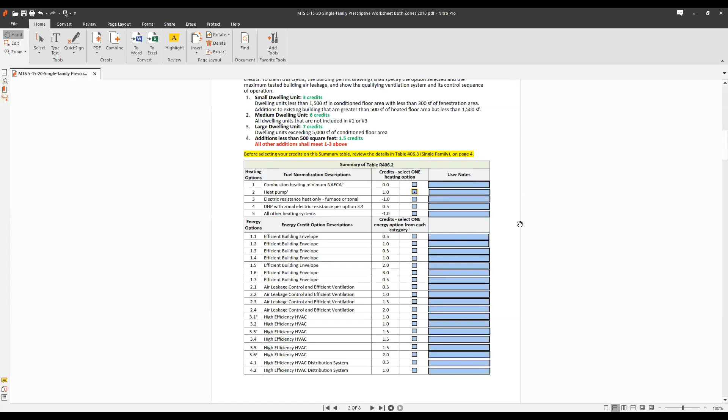So we're going to assume this is an all-electric home with a central heat pump, and then we're going to go in and look at the different energy options. So the first pack is the options in column 1, and those options have to do with the building envelope. Let's click on option 1.1. And if you click on that one, that'll give you a half a credit.

And what that is, that's like going to an R38 in the floor and getting to about a .28 window. It's a little bit better shell. Now let's see if we go down to the section 2 energy options. Those are the build tight, ventilate right options. A lot of people take that 2.1. That's basically testing the building down at 3 air changes an hour and putting in an Energy Star exhaust fan that's energy efficient. So let's start with that one.

So now let's go down to the 3s. The 3s are the HVAC system. So in this case, you could take the high efficiency HVAC system 3.1, that would be the heat pump, and it has a little bit higher HSPF than is required. Well, let's see, you want to take 3.2, let's check. 3.1 if the heat pump, yep, 3.2, excuse me.

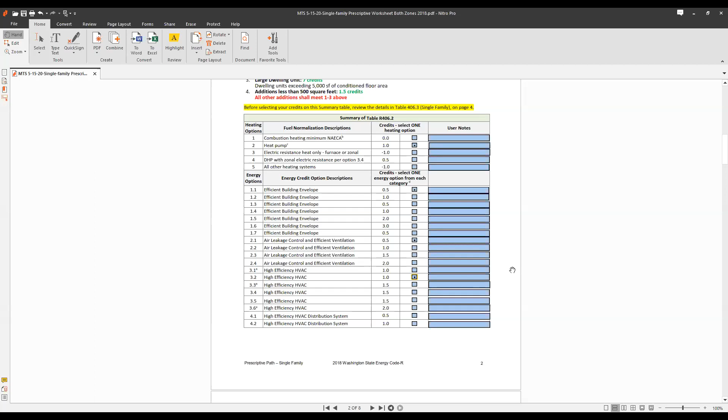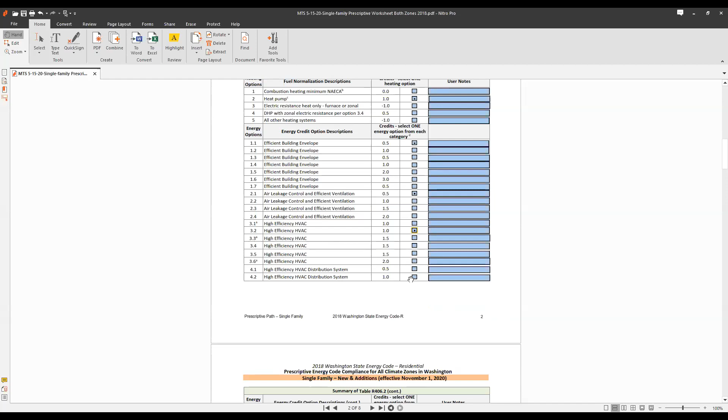So then if you go down to, say, hot water on the next page, and then, oh, I'm sorry, then we want to move all the ductwork into the conditioned space and get a credit for that under 4.2. So click on 4.2. Now, if you scroll down all the way, you're at 4, and you need to get to 5. If you put in a heat pump water heater, and say you wanted the one that's the tier 3, that's probably a 1.5, that's 5.4. If you go with 5.4 credit, now you're, yeah.

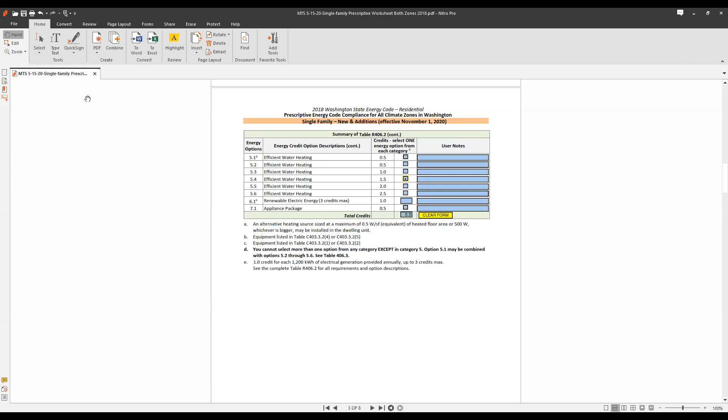Hey, Mike, sorry to interrupt. Can you make your screen bigger? You've got a lot of white space and the letters are practically invisible. Oh, thank you. Melinda, can you do that? Oh, yeah, much better.

So here you'd be at 5.5. You need 6. You need to come up with another half a credit. So you can do this by going to a more efficient heat pump water heater. If you went to the tier 3, that would get you 2 credits, and hit that, and bingo, you're there. So let's just recap. You got 5.5. That's a heat pump water heater.

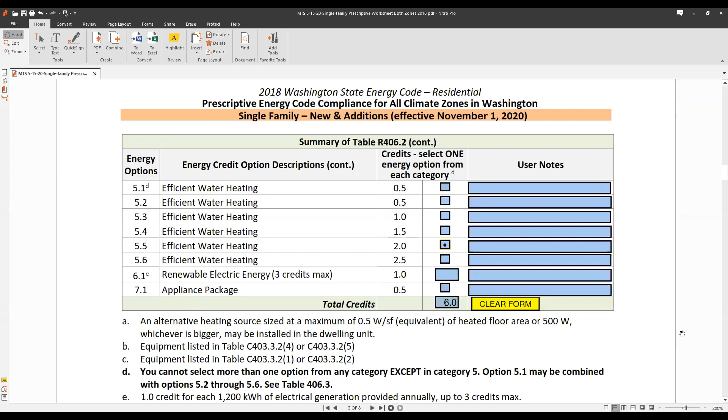Why don't you scroll back up, Melinda? Whoops, too far. We're going to move all the ducts into the conditioned space, get a credit for that as 4.2. We're going to get a credit for a high efficiency heat pump, and we're going to get a credit for, no, I'm sorry, go back up. Sorry about that. And we're going to get a credit for a little bit more efficient building envelope that's built tight and ventilated right. And that's how we would get one option towards getting the 6 credits.

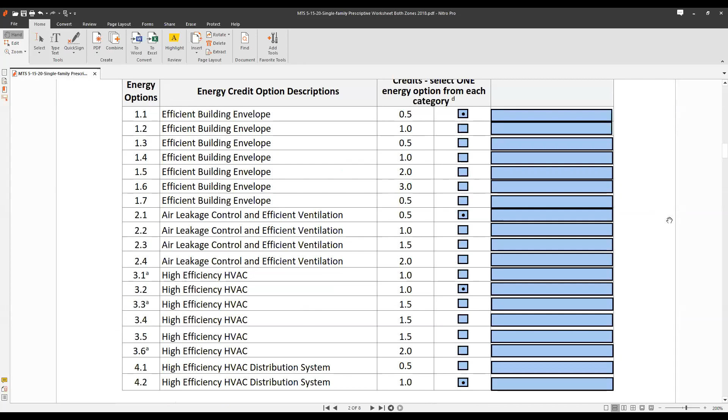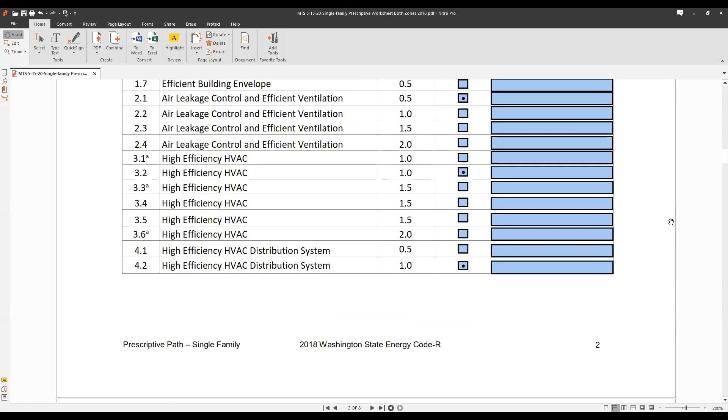And this is just a little show and tell of the form that's going to be fleshed out. And there's a whole bunch of other options. I think a lot of the Eco Building Guild members that are more focused on envelope to comply are going to get very innovative, and we'd like to see what you got in the way of coming up with ways of meeting the envelope requirements. There's also some options, Melinda, if you scroll down a little bit more, for renewables and appliances. And we'll talk about that a little bit in the presentation. So I apologize, I couldn't see a lot of that, but this is just kind of a quick show and tell.

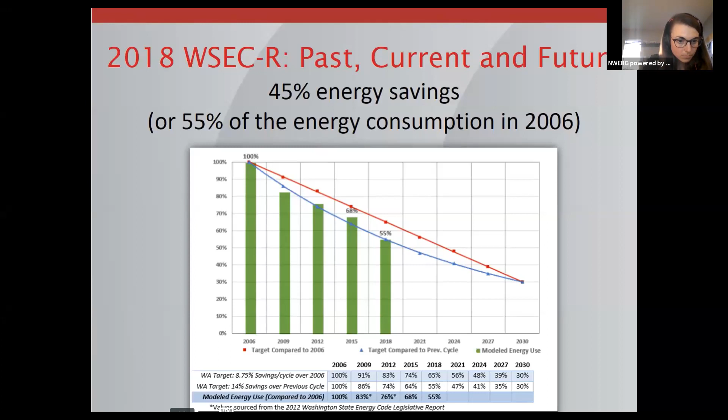The challenge is that as we get lower, we have less opportunities to find cost-effective measures, or in other words, the low-hanging fruit isn't there anymore. This really is going to challenge us, and I'm going to present some of the solutions for meeting today's energy code and the future energy codes that will be coming by finding a balance between mechanical HVAC, water heating, thermal envelopes, and renewables. And the energy code will provide some flexibility towards meeting those goals.

The code is broken out into 6 chapters: scope and administration, definitions, general requirements, residential energy efficiency. That's a big one to review. And if you're involved with additions, existing buildings, change of use, it's critical that you understand Chapter 5. In addition to that, we have our reference standards, and that's just pretty standard boilerplate.

We do have Appendix A, which is there to help guide you if you have heat loss questions as you develop your U-factors for your assemblies. If you're using non-conforming types of assemblies with different types of products that aren't necessarily part of our prescriptive compliance approach, you'll need to refer to Appendix A for equivalent U-factors. I'll get into that a little bit more. There are some other appendices as well associated with modeling, software, and the weather stations.

Really, Chapter 4 is where the meat and potatoes is in terms of understanding how to meet the energy code. Section 401 is general. Section 402 gets into the building envelopes. Section 403 is mechanical systems, water heating, HVAC, etc. 404 is electric power and lighting systems.

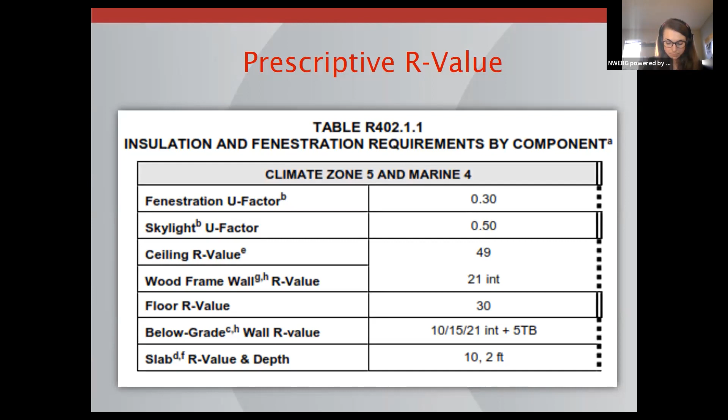These have been around for quite a while. Now, we're going to get some additional credits. 406 that I've been alluding to is the additional efficiency requirements for all new construction covered by the code. This includes additions. We're not going to talk too much about additions today, but they need the energy credits. And change of occupancy. Say you're turning an old shop into a dwelling unit or a garage.

Anyway, these are all requirements that are in Section 5, which is the existing homes area, and all the requirements you'll need in Section 406. So this is where we need to get to. All right. So these are how these energy credits are factored. Small home, 3 credits. This would be 1,500 square foot of conditioned floor or less. Medium, 6 credits. Large dwelling, 7 credits.

Dwelling serving R2 occupancy, that is low-rise multifamily. Not townhomes, but low-rise, 3-story or less multifamily. Generally corridor loaded or individually garden style, what they call woody walk-ups. 4.5 credits. That tripled from 2015. Additions went to 1.5 credits. Less than or equal to 500 square foot. It used to be a half a credit. So there's going to be some real challenges, particularly in the medium dwelling and the R2 occupancies as well as the additions.

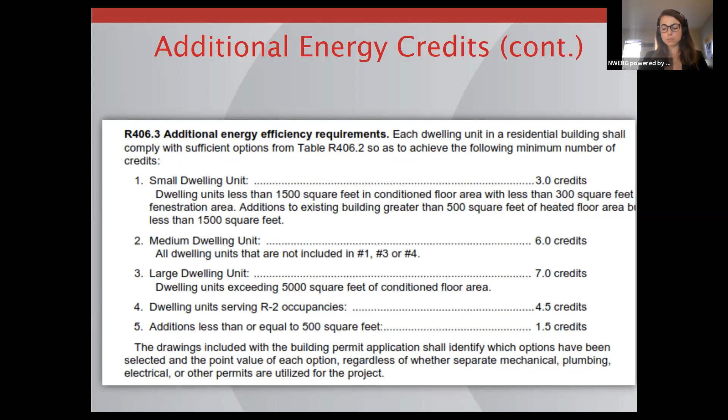All of the information on these energy credits needs to be clearly identified on the plans and the permits and the tools that we have to show compliance, like the prescriptive path worksheet. All right, where were we? We were at 1.5 credits for small buildings. That went up to 3. 3.5 credits went up to 6 for medium-sized buildings. Again, large buildings went from 4.5 to 7. This is 5,000 square foot large dwellings.

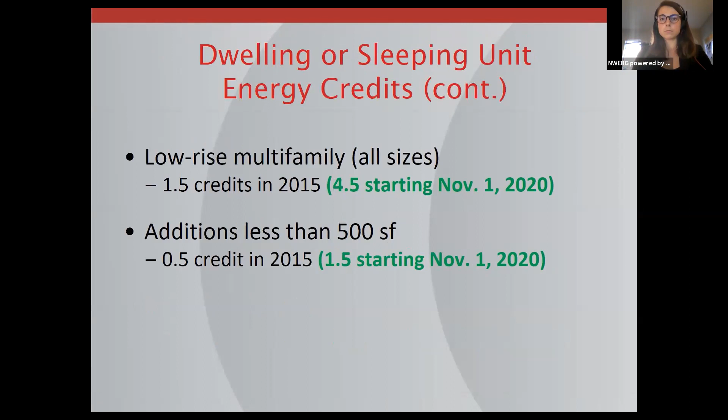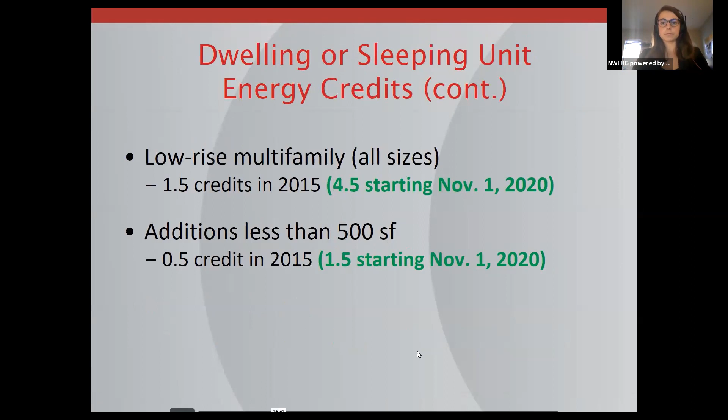Multifamily went from 1.5 to 4.5, and additions, the small additions less than 500 square foot, like a garage ADU or something, went from 1/2 to 1.5. In addition to that, there was a proposal that was accepted, appealed, and the appeal denied, having to do with fuel normalization. This gets back to carbon emission equalization.

As I noted, the requirements in the energy code from the state legislature require improvements in energy savings to 2030. There's another metric that has entered into the realm, and that has to do with reducing our carbon footprint and looking at energy codes as a possible way to help in that reduction. This is what we're talking about.

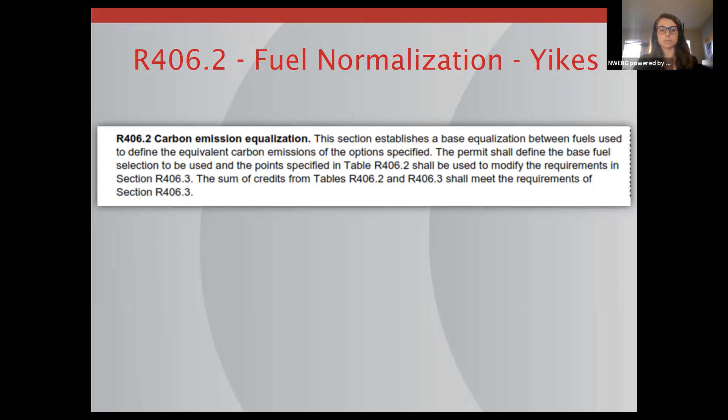If you're building a home and heating it with a combustion device, in other words, a gas furnace, oil boiler, something like that, that uses combustion heating and fossil fuels, you will get no credits in the energy code for that. So say you're trying to meet 6 credits, you get nothing if you put a gas furnace in or a fossil fuel furnace. Doesn't ding you, but you don't get any credits.

Now, if you go to system type 2, the initial system uses a heat pump. This is just a minimum efficiency heat pump on the market. You get a full credit, both in single family, which is called all other, or R2, which is the low-rise multi. Now, if you got into an electric resistance heat, so this would be baseboard, Cadet type heaters around the house with no heat pump, you actually have to come up with another credit. You get a negative credit in both single and multifamily.

If you put a ductless mini split in, which quite often folks do, and you do that in accordance with the requirements that would allow you to put it in the primary living area and heat the other areas with electric resistance, instead of a heat pump in type 2, which gets you a full credit, you'd get a half a credit for that mini split serving the large area. And any other credits that don't fall into that would be a negative credit and would make it more difficult to comply with the code, both in the single family, and there's a half a credit there for R2.

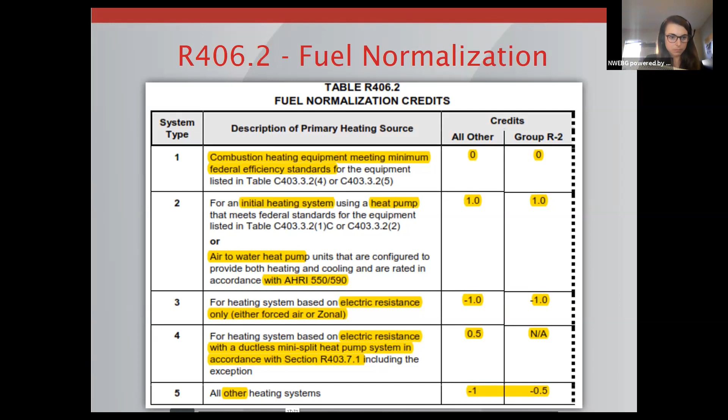So now let's talk about the energy credits in general. And I'm going to start by pointing out that this is kind of like a Chinese menu. You get so much from column 1, so much from column 2, column 3, all the way up to column 7. But you're only allowed, generally speaking, 1 from each column. So the first important area to understand is the energy envelope credits. Now, these credits have been changed from the 2015, a lot more of them.

And I'm going to quickly go through what these credits are. Credit 1.1 is basically going to a better window or vertical fenestration of U-0.24. So if you take our glazing worksheet, which is available to help you determine what the overall fenestration U-factor is, and you put in your window schedule, and you come up with an average of 0.24 or less for your fenestration, you would get a half a credit by taking option 1.1.

Instead of going 0.24, say you went to a triple pane window and went something around a 0.20, you get a full credit in both single and multifamily. Now, if you wanted to combine that, say a slightly more efficient window than the minimum 0.30, say a 0.28, this is what quite typically is available in the market with the current code, and you add R8 to the floor. So instead of an R30 in the floor, you have an R38. So slightly better window, 0.28 window, R38, or if there's slab on grade, the entire slab would be insulated. If you were to do that, you would get half a credit in the single family.

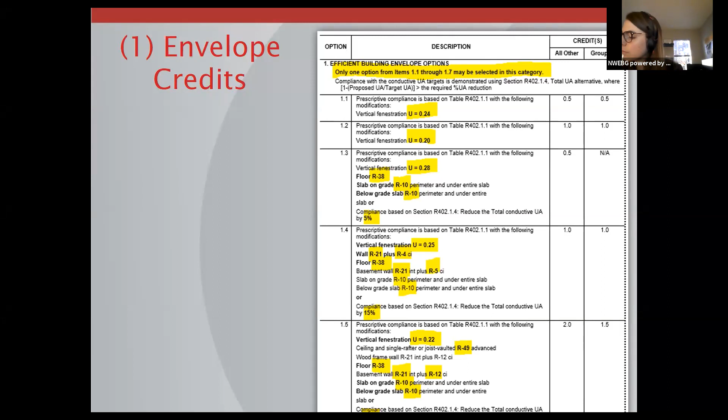We also have some other credits that are really high efficiency, super triple pane windows, 3 inches of foam sheathing, R48 in the floor. This is 1.6. We're showing a 40% reduction in the envelope to get you 3 credits. These are kind of passive house level credits, or very energy efficient builders building with double wall construction and very innovative building systems. For those, you get 3 whole credits and you can reduce the need to put in expensive HVAC and mechanical equipment. It's all about your comfort, your familiarity, and your sub's familiarity with these options.

I would encourage all builders and subcontractors to start looking at the future and deciding, is this something they want to get up to speed on now? Do I want to learn about how to build a higher R-value wall? Do I want to learn about what are the challenges of triple pane windows?

Anyway, then option 1.7 is a little step back, and if you needed a half credit, you could get that half a credit by going to reasonably good windows, which are out there now, and everybody's using at about a 0.28, and go to an R49 advanced ceiling. And that would be like an oversized truss or a way of making sure you have R49 fully at the eave all the way out where it tapers. And that's a half a credit that might be afforded to folks that want to do that. Okay.

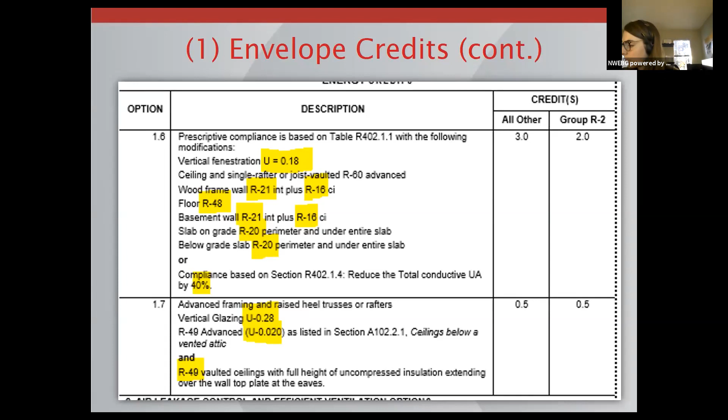Next is column 2. This is getting into what we like to call build tight, ventilate right philosophy in residential building science. It's about controlling the air leakage, building the home tighter, and then putting in effective mechanical ventilation that allows the occupants to control their indoor environment as opposed to Mother Nature.

I've been working in this field for over 40 years, and the question I always get when we talk about build tight, ventilate right is, how come they make us tighten up the home and then they make us put a fan in to ventilate it? And I always answer it as, who do you want in control of the indoor environment and your indoor air quality? Mother Nature, or your tenant, or the building owner, or the occupant, the homeowner? Whoever it is, they're empowered to control their environment as opposed to Mother Nature.

With Mother Nature, in the winter, typical homes are over-ventilating and wasting energy. In the summer, they're typically underventilating. In the shoulder months, many people don't open their windows for a variety of reasons, and they can also be underventilating. It also means that if there is some sort of a pollen event or some sort of event where you might not want to ventilate, you don't have control because you have a leaky home and Mother Nature's in charge. Build tight, ventilate right. The philosophy, again, is who do you want to be in control of your indoor environment?

It's not without challenges. If you're going to build tight, ventilate right, you have a responsibility to let everybody involved know what your goals are. And that includes education of the occupants and commissioning of the system, which I'll talk about later in this presentation.

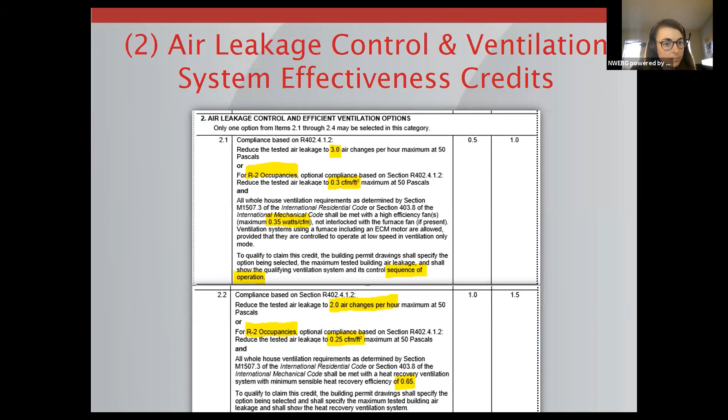All right, so you get a credit if you get down to 2 ACH and put in a reasonably efficient air-to-air heat exchanger or energy recovery ventilator. If you make it tighter, if you get it down to 1.5 and put in a more efficient heat recovery ventilator, you get 1.5 to 2 credits.

2.4 suggests down to passive house levels. Really takes some experience to get here. And you get down to a 0.6 air change at 50 Pascal, tested blower door credit. Then you're able to get a high efficiency heat recovery ventilator with 80% or 0.8. You get 2 credits or 2.5 credits in multifamily. So that's the cookbook for the Build Tight, Ventilate Right option 2s.

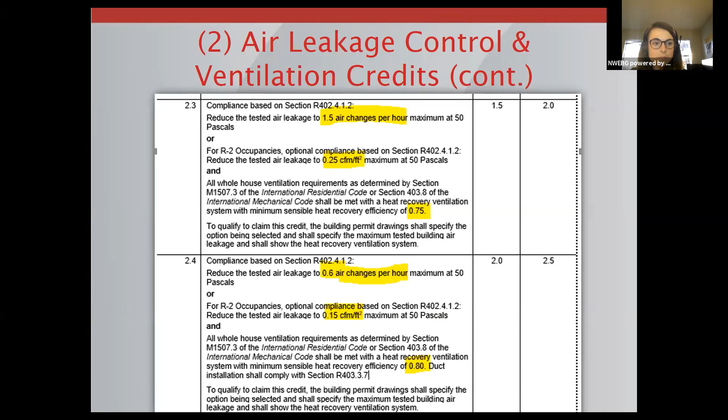Option 3s really get into the HVAC side. So once you've figured out what you want to do on the envelope and equipment for ventilating, then let's think about what kind of HVAC system you're going to be putting in. As I noted, you won't get any credit for the gas furnace, but if you put in a condensing furnace using 3.1 high efficiency Energy Star furnace, you get that credit.

Or a boiler with Energy Star boiler. Now, if you put in a central heat pump, not with a minimum efficiency, but a little bit higher than the federal minimum, with a heating seasonal performance factor of 9.5 or greater, you get an additional credit. In other words, you get that fuel credit before, plus this additional credit for going beyond the minimum heat pump efficiency. Same thing for 3.3.

You get a COP on a ground source heat pump. This would typically be done in a large McMansion or larger 5,000 square foot building where you typically see these, or in some sort of district heating in the event of a commercial shared integrated system.

The other way you can get a credit, and this is the way most people do that have balanced out electric resistance in the bedrooms with a primary heating system that was zonal electric, what they do is they put a mini split in the largest zone of the house, and it is able to take away a lot of the electric resistance heat from the other zones as well as the primary zone.

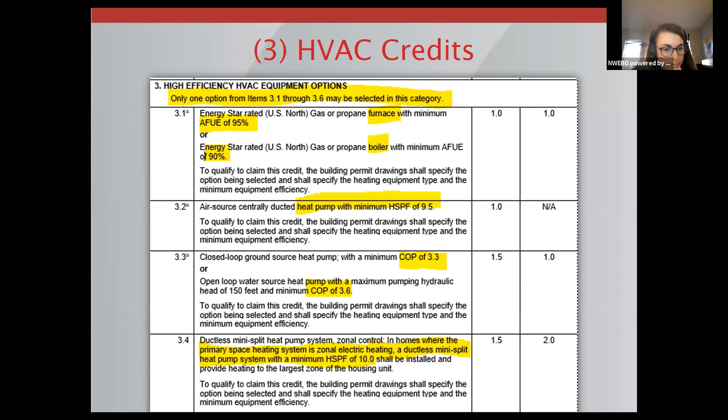We have some more. If you were able to put in a centrally ducted system and put in a heat pump with an HSPF of 11, this is a higher performing heat pump. You get a credit and a half for it in single family. There is no credit for it in R2 multifamily.

Then if you were to go to a ductless mini split where you didn't have electric baseboard in the back bedrooms, but you had other types of efficient mini split heads, and they all had a minimum HSPF, heating seasonal performance factor of 10 or greater, you get 2 whole credits. So if you start to go to a ductless system and no electric resistance backup, you get up to 3 credits in R2 and 2 credits in single family.

You'll note this little footnote A. It's important if you are getting the credits where footnote A applies. That means you can't be putting in any backup electric resistance heat more than a half a watt per square foot. That means a 2,000 square foot home, if you needed to put some heat into the bathrooms or some little utility closet, you'd be limited to 1,000 watts. This is something to pay attention to as you design your heat pump system serving all the zones.

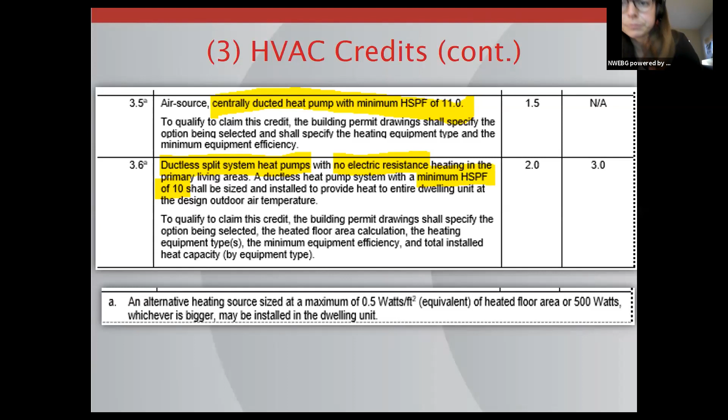Distribution credits. Now, if you were to go to a ducted system, and you move all the ductwork inside the conditioned space and the air handler, you would get credit 4.2. This is the most important credit in the new energy code. We're not going to be able to move forward in the future meeting the energy code in a cost-effective way if we keep putting our air handler in the garage and we put our supply ducts in a vented crawl space and our return ducts in a hot or very cold attic. This is the way it's always done, and this is the way it can no longer be done. This is the big change in the energy code.

And I'm going to talk a little bit about this. So this is the buried ducts. You get a full buried duct credit. You don't have to test for 4.2. We did provide one other option. If you move your air handler inside, you're allowed to bury some of the supply ducts and return ducts up in the attic, but you only get a half a credit, and you still have to do the testing of the ductwork. So this is the most cost-effective credit, 4.2, that anyone has ever had for years, and now it's going to be time that we take advantage of it.

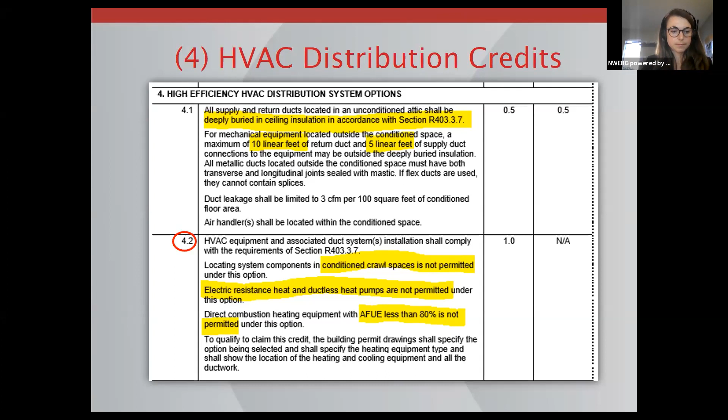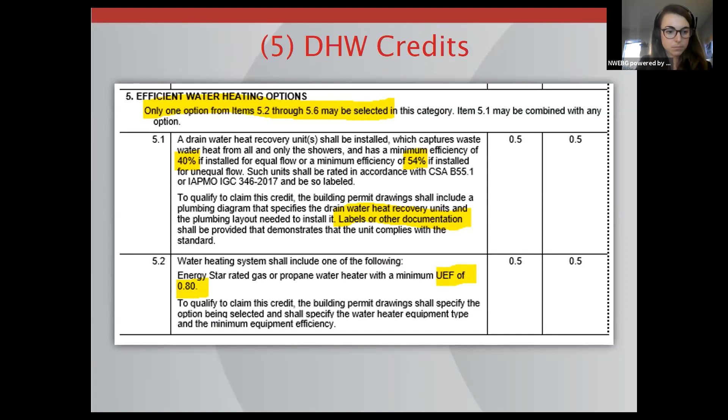Or if you put a solar hot water system in, which we have not seen a lot of. We've seen a lot of solar PV, but not a lot of solar thermal. But you could also get the credit for solar hot water. I know some of that's going on over in Eastern Washington with some innovative builders. Water heating, the way that folks are going to be moving in water heating, if they're not going gas in the future, is to heat pump water heaters. And these are virtually going to be needed if you want to come up with the sufficient energy credits in many of the cases here.

You can get a heat pump water heater credit of 1.5 for a tier 1. I would encourage everyone to go to NEEA's advanced water heating specifications. Just Google NEEA and hot water and spend half an hour learning about this technology. This is critical technology. Along with ducts in the conditioned space, this is a technology that you most likely will need to be familiar with and embrace with the new energy code.

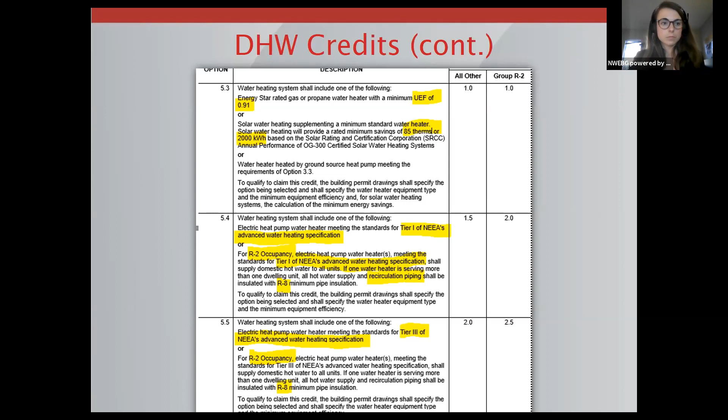You can even get the tier 3. Most of the products out there now are the NEEA tier 3 and get 2 to 2.5 energy credits for it. If you were to go to a high efficiency split system, a heat pump water heater with a UEF of 2.9, there's a few of them in the market, you could get 2.5 to 3 energy credits.

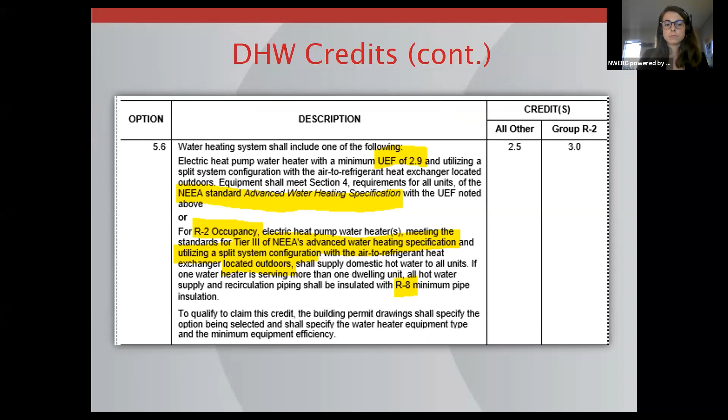There's also credits for renewable energy. So generally speaking, around here in western and eastern Washington, a well-oriented performing system will, for every kW of PV power, generate anywhere from 800 to 1,200 kilowatt hours. If you were to put in a 3 kW system here, you could get a credit for each kW roughly. So we're talking about being able to show that you've got 1,200 kilowatt hours of generation, and for each 1,200 kilowatt hours, you get a credit, up to 3.

So if you put a solar system on a multifamily building and apportioned it to each of the units, that might be a solution for some builders to get some of the energy credits they need. Same thing with single family. If you're going solar, consider these energy credits.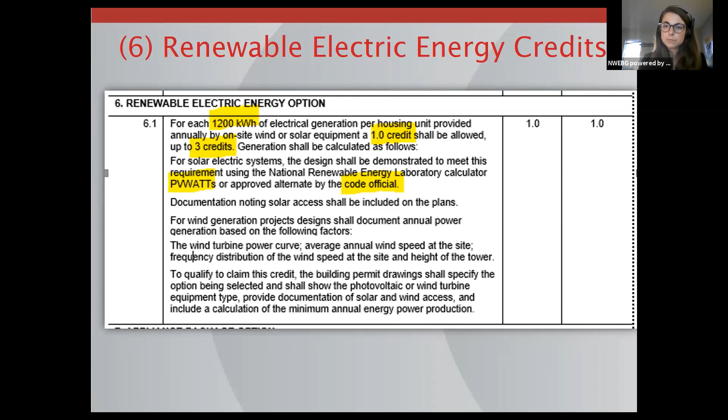There's also appliance credits. These are new. We'll talk a little bit about what they require. You get half a credit for it in a single family and a credit and a half in multifamily R2. A dishwasher, Energy Star rated, that's no big deal. That's pretty much all of them out there. No real incremental cost for that. Or an Energy Star refrigerator. And you would only have to provide the refrigerator if it was being installed as part of the home. If there was no refrigerator there, then you would not need that credit.

However, the big jump is the Energy Star rated dryer, which is a ventless dryer that has to have a significantly higher efficiency, a CEF of 5.2. This is a new dryer that's gaining a lot of attention in the United States. It's been used in Europe for years. This may be an option that many multifamily builders want to look at because it eliminates the need for a dryer vent or a penetration in the exterior envelope. So that's the appliance credits. Get familiar with the Energy Star appliance program and see if this meets your needs for your credits.

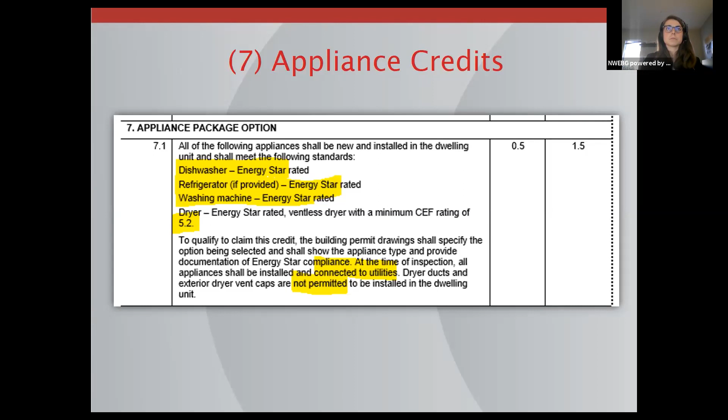All right, so let's talk about where the combinations are that might get you there. I'm going to give a couple examples. This is an all-electric heat pump home. It's your medium-sized home where 6 credits are required. In other words, it's somewhere between 1,500 and 5,000 square feet. First credit that we're going to get is a 9.5 HSPF, centrally ducted heat pump that's serving the house. And there's no backup heat other than, say, half a watt per square foot.

That's footnote A. Then we moved all the ducts into the conditioned space because we actually sat down with this floor plan with the heating contractor ahead of time and the builder and the designer and figured this stuff out. If you don't figure it out, you'll never get this credit and you will have lost the most cost-effective option in the energy code. Let's get this credit on every new home. The code needs to transform our practice in the Northwest of moving ducts into the conditioned space and getting them out of the garage, the attic, and the crawl space.

You don't buy an expensive Tesla and drive it on flat tires, nor do you buy an expensive HVAC box and run it in an unconditioned space so that only 2/3 of the heat that it generates makes it to the house. That's what 4.2 is all about. I'll talk to you a little bit more about that later and the importance of it.

Then we build tight, a little tighter, get it down to 3 ACH. That's just coordinating with your sub so that they know who's going to seal the leak, where the leak is, when that leak gets sealed, what material that leak gets sealed with, and who's going to check on it. It's just basic QA, whether it's gas piping, ductwork, or water piping.

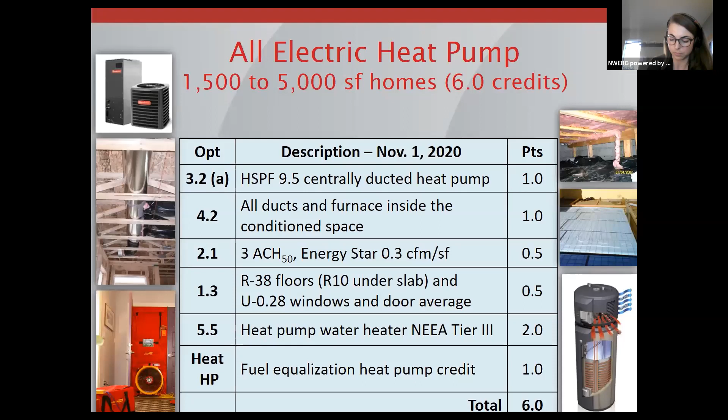Next one would be, say I don't want to use that heat pump water heater. They're going to run out of water. I want to have some gas water heat. Well, so now we go to a higher efficiency heat pump, get a little bit higher credit, move all the ducts inside. Don't want that Tesla on flat tires. Continue to build tight, ventilate right, put in the good windows and the floor insulation, and now go to a tankless water heater, as you'll see down in the lower right-hand side. This is vented to the outside, combustion air from the outside, no interaction with the inside, no venting issues, and you get a fuel equalization credit because you went with a heat pump, even though you had gas water heating. The fuel equalization credit only applies to the space heating. All right, so that's how you get there with a heat pump heat and gas water heating.

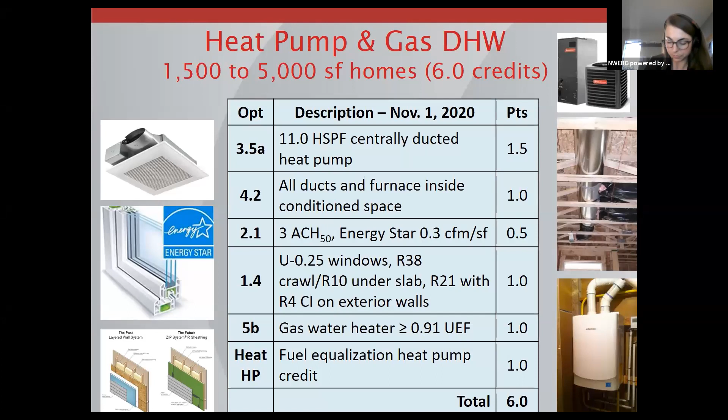Now, so you wanted to do gas heat. I want a gas furnace. And you might need to be putting in a heat pump water heater or coming up with some more of the innovative envelope measures. So you put in a 95% gas furnace, get a credit, move all the ducts and the air handler inside, build it tight, ventilate right. Slightly better windows. Now you're going to have to put R4 CI on the walls, foam sheathing or something equivalent to get that credit. And you need to go to an appliance or something equivalent to get a half a credit. And then you get your heat pump water heater in there and get your 2 credits. So the gas heat's going to be a real challenging one. But this is one option on gas heat.

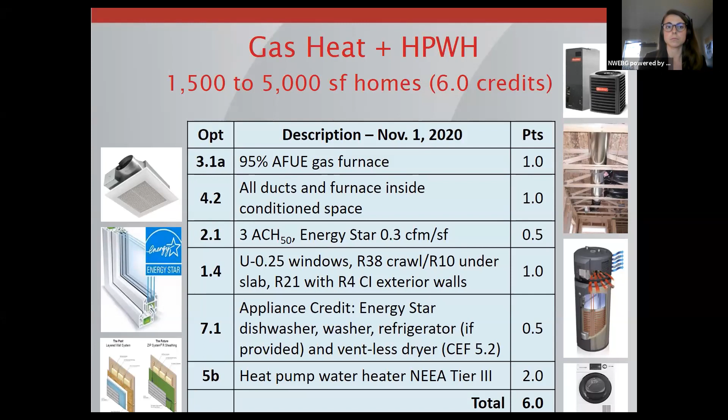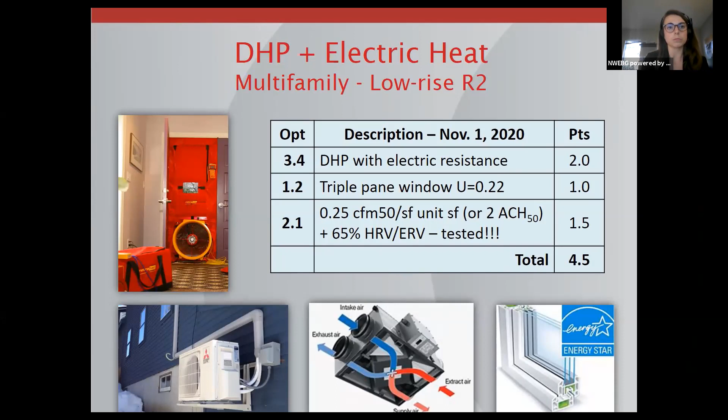Now let's talk quickly about ductless heat pumps, electric resistance, multifamily. Go with ductless heat pump with electric resistance, triple pane, heat recovery ventilator, and a tighter envelope. That would get you there. If you went with ducted cassette units or some sort of combination of mini split or multi-head heat pump that serves the entire unit, and there's no electric resistance backup, you could get the fuel equalization credit, the 3 for the heat pump, and build tight with an HRV, and you get your credits that way. You actually have a little bit extra.

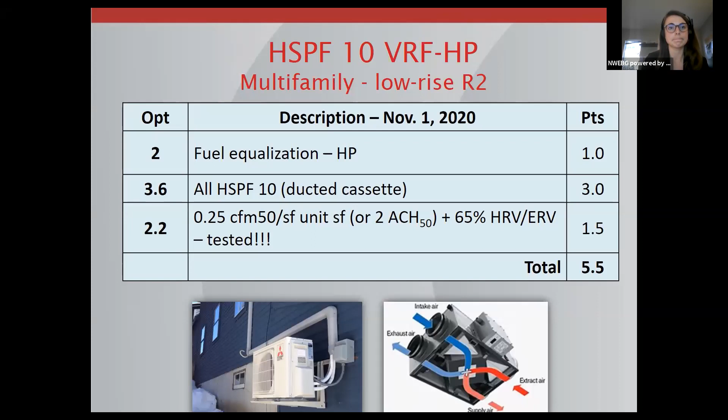So let's talk about the other compliance paths. At this point, we've gone through some of the options in the prescriptive paths, and the UA alternative is something that if you have envelopes that aren't prescriptive assembly, you can use default values to get there. The challenge with the UA alternative is that if you're building a house with more than 15% glazing, it becomes a lot harder to make it comply. The prescriptive path allows unlimited fenestration, whereas the alternative UA does not, nor does the simulated performance path. Note to architects, if you're building a house with a lot of glazing, this is going to be a challenge to you.

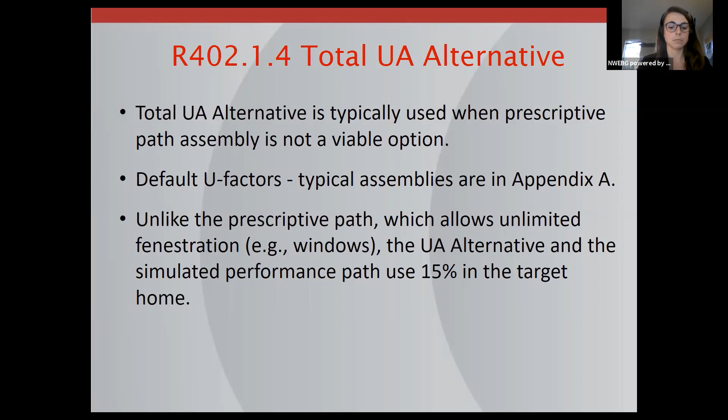All right, so we have a software program that does these calculations. You would go in and put the information in on the particular home and the size of the home. It will determine how many energy credits are needed, as well as what UA your proposed design has to come in to to meet the code. So here we have a 2,300 square foot home where the target U values are based on the prescriptive path, and a target UA of 367, that's BTUs per hour per degree Fahrenheit.

And you also would have to come in with 3.5 credits for the size home. The proposed design, if you look at it, has 398 as the UA, and the credits are 3. So this clearly would not comply, for 2 reasons. It's short on credits, it's short a half a credit, and it's short on UA. So they have to go back and make some adjustments and do more trade-offs so you could come in under the 367 and also select another energy credit.

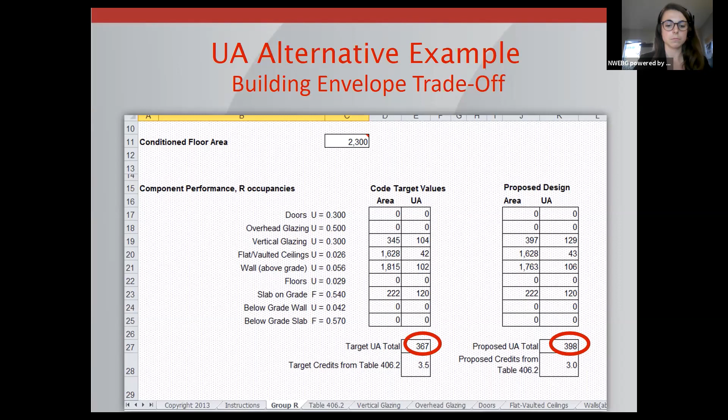As I said, not many people use this approach. If you do and you have questions, we have a training video on it, and also call us and we're happy to help you. Simulated performance approach has the same challenges. It makes it harder to comply when the building is over 15%. And also, as I noted, we're not aware of currently any software that meets the requirements to be used. We may start to see this as energy raters start working with builders who want to meet our energy code and also want to get a tax credit this year.

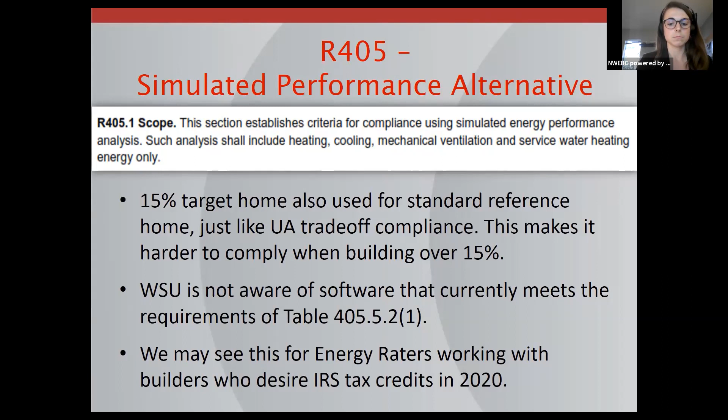All right, we're going to start to talk about the other end. We've been talking about the design end and what needs to be submitted at the design end in terms of compliance. At the field inspection, before a CO is given on the home, a permanent certificate shall be completed by the builder or the approved party. That needs to be posted on the wall in the space where the furnace is located, utility room, or an approved location. The certificate shall list the R values, ceilings, walls, slabs, all of that stuff, the U factors for the glazing. It needs to have the HVAC, the water heating, the appliances, the renewables, and it needs to document the testing of the ductwork leakage.

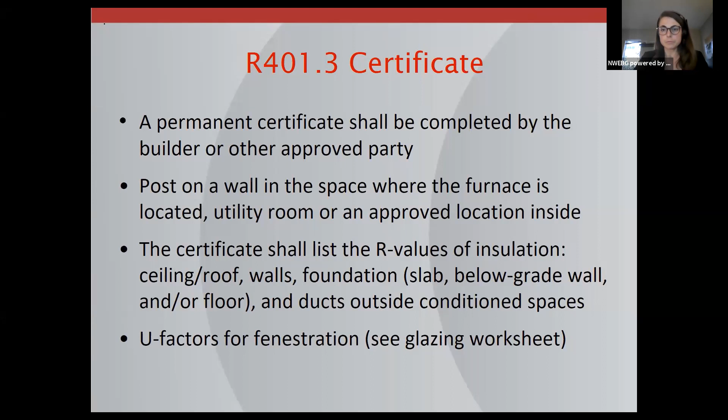Remember I noted that if you move your ductwork outside the conditioned space, you need to test the ductwork. Well, that would need to be documented. The results need to be documented on the certificate, as does the blower door test. Remember I said you need to come in at 5 ACH50 to meet the code and get a CO, or lower if you're trying to get some energy credits. That will need to be documented with an envelope air leakage, what they call blower door test. In addition, if you're going to build tight, ventilate right, you need to commission the ventilation system and make sure that it is ventilating right. So you're going to need to document the flow rate of the system in accordance with the codes. And this is the certificate.

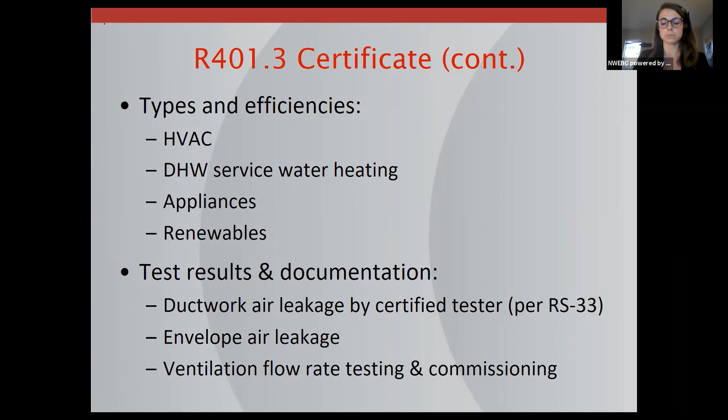The code official may require test documentation, including an electronic record of time, date, location of the test, using a time stamp, smartphone photo, or air leakage testing software. I've been working the code program for almost 2 years now, and I can tell you that there's a lot of non-compliance with the blower door and the duct leakage tests. People are cheating, writing down incorrect numbers, or just writing down things because they didn't know better. What we call outliers. As a result, the new sticker has a requirement to provide GPS and timestamp verification so somebody can't write the same number down over and over and over.

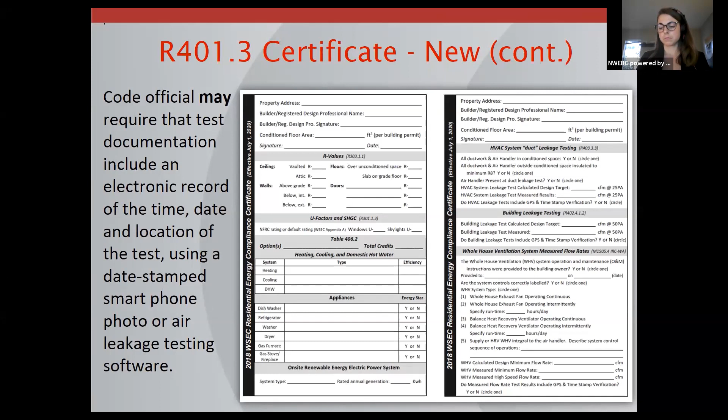Expect building departments will start asking, do you have documentation of these tests that you wrote down on the certificate? Expect the building departments will start asking for these certificates to be completed and signed off on. So this is really important. As I noted, here's the section on the duct leakage testing. You notice it says, do HVAC tests include GPS and timestamp verification? It also asks that for the blower door, the building leakage tests. And a whole new section on the mechanical ventilation system. Somebody's going to need to sign off that they provided the operation and maintenance instructions to the building owner, and on what date. They have to define what the type of system is and if it was correctly labeled and specify the controls.

Then they need to determine what the design flow rate for the whole house ventilation system was and determine that that is being set on site during commissioning. It also asks to turn the system up to high speed and measure the flow rate. Many times people will want to have a little bit more flexibility to increase the ventilation rates when more people are in the home or something's going on. So we're documenting the measured flow rate for compliance with the design, and also documenting the flow rate on high speed. And then again, can you verify it?

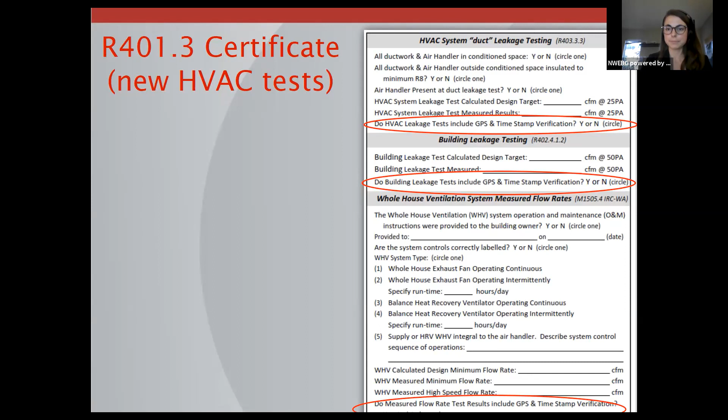If you are the tester, you may have the duct leakage affidavits to sign and give to the builder so that the builder can fill out the certificate. We have these affidavits for new construction and existing construction on our website you can download, or use your own agreements. We also have tools for the duct testing calculations if you're not going to do them with the software provided by the manufacturers, as well as the blower door calculations. So those are calculators and affidavits that are available to help the subcontractors document their work to the general.

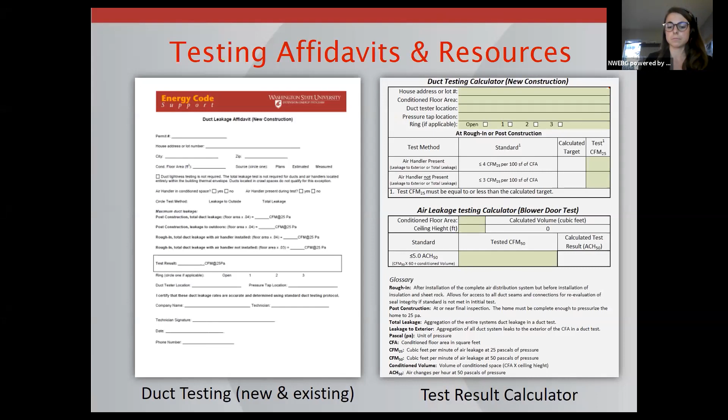All right, so why is it that we seal ducts? We seal ducts for health and safety, comfort, energy savings, and durability. Here's an example. It likely has to do with some moisture damage from overpressurization of a home. We don't know, but we will learn.

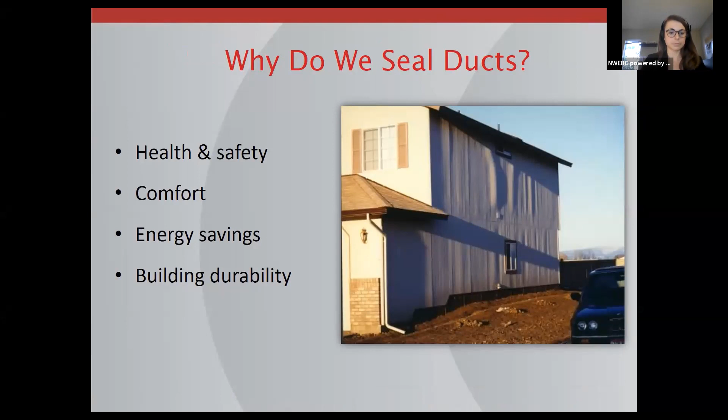So as I said, there's a criteria in our code that all ductwork that's outside the conditioned space or buried be tested. Generally, for every 100 square feet of conditioned floor area, you can only have 4 CFM of leakage. That means for a 1,000 square foot home, the duct test has to be under 40 if you test it at rough-in. If you test before the air handler has been installed at rough-in, then it would be 3 CFM, so 1,000 square feet would have to be less than 30. If you do a total leakage test at the end, it would be 40.

And there's some options for the blower door and the duct blaster to be used together to measure leakage. And that last bullet, where you're also pressurizing the house so you're not measuring the leakage associated with the ducts inside the home, and that would be done at post-construction. Better off to try to get the ducts tight at rough-in. But if you need to, or if you failed, sometimes the leakage-to-exterior test can help you get out of a jam.

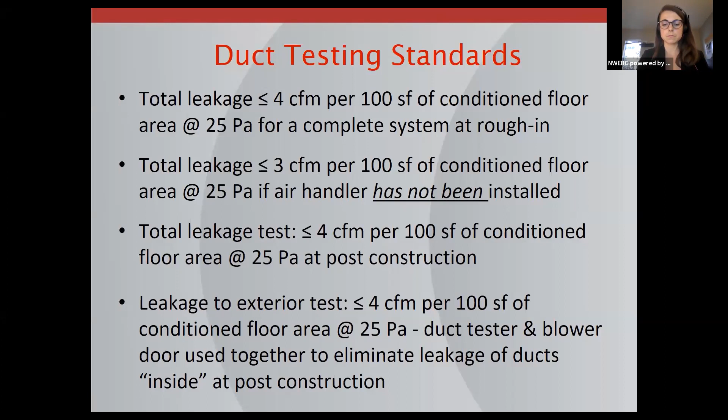So why do we seal ducts? All joints need to be sealed. Connections shall be mechanically fastened and sealed. These have been in the International Mechanical Code for years. And unlisted duct tape is not permitted as a sealant. Duct tape is good for everything but ducts. Have you ever been up in an attic, 120, 140 degrees in summer, and the duct tape's been there for 20 years, and it's dried up and peeling? That's what happens with duct tape.

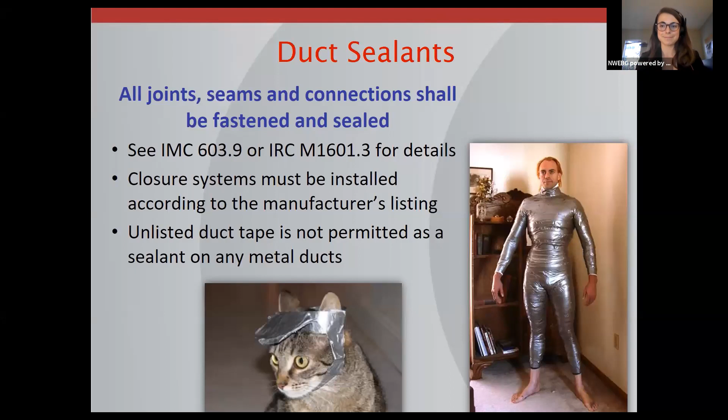So if you're going to do some duct testing, we have a series of training classes for heating contractors to get certified so they can get their name on our list as a trained duct tester. That doesn't mean that you don't need to learn how to use the necessary equipment from the manufacturer. But our training will teach you what the requirements of the code are and why it's important. So this is the kind of equipment you need: a duct blaster. The upper one's the Energy Conservatory, the lower one is the Retrotec, and some masks to block off and measure pressures.

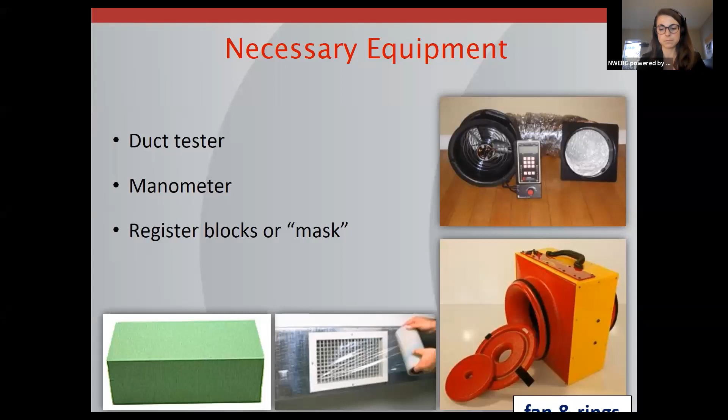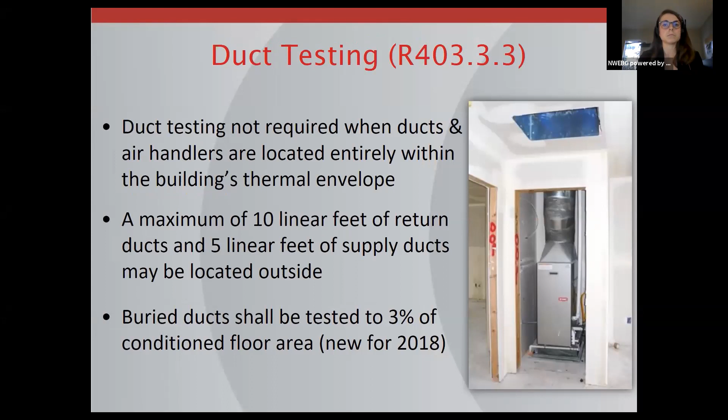As I said, duct tests are not required if the air handlers are located entirely within the building. And we do have a little exception where we allow 10 linear feet of ducts on the return side and 5 on the supply, and you still can get this credit. Buried ducts still need to be tested, though. Here's the criteria on the testing. I'm not going to go into that, but I would familiarize yourself with the code. All ducts have to be R8. Buried ducts, some other examples and some resources you can evaluate to learn more about making sure that if you do bury a duct in the attic, you've effectively insulated it and not disturbed the requirements for the insulation up there.

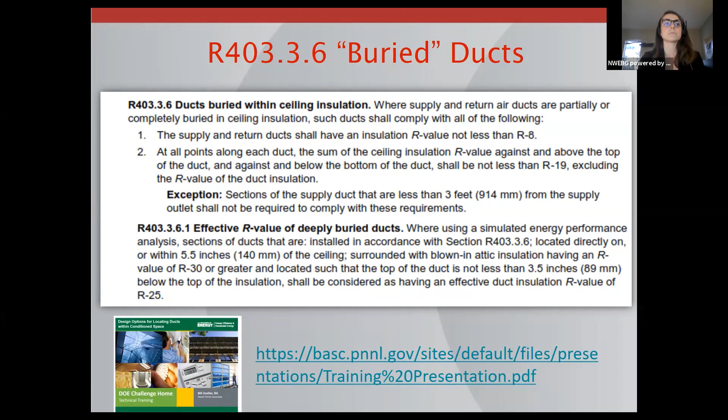All right, so let's get back to real cost-effective, keeping you from driving the Tesla on flat tires. Move the HVAC into the conditioned space, out of the crawl space, garage, or attic. It's by far the most cost-effective thing. It requires design planning between the builder, his sub, and the floor plan designer. Let's not drive a Tesla on flat tires. It's time. We have to do this if we're going to be serious about cost-effective improvements to our houses and our buildings.

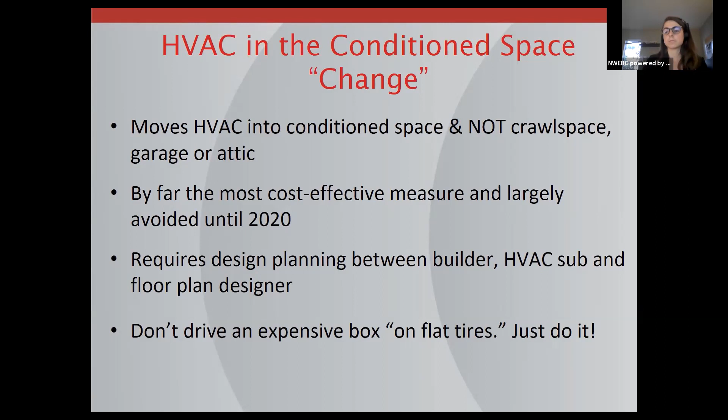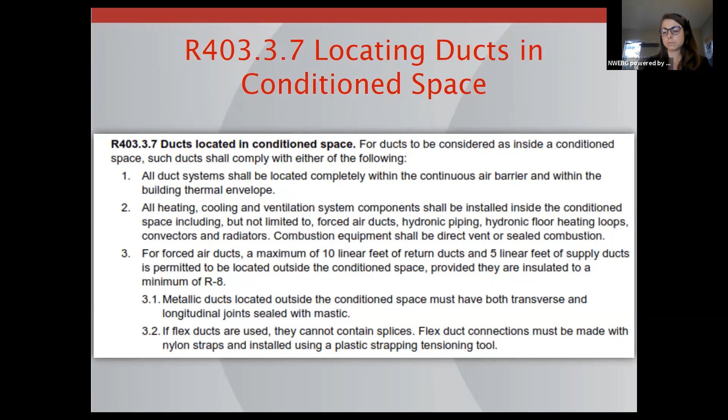So, why are we doing this? Why are we trying to move them inside? Well, when you do this, when you actually spend the time and go through every one of your floor plans with your HVAC person and your designer and figure out some of the tricks to getting it inside, you end up using less ductwork and smaller ductwork. And once you've done that, it's really conducive to good installation.

Nobody can see a guy crawling on his butt in a crawl space with a flex duct 25 feet from the entry to the crawl space, wrapping mastic and zip tying. It's a failure point. We know this from utility programs. If you're in your house standing on a ladder, everybody can see your work. It's good QA. You have less ducts to put in, and the ducts you put in are easier to install and easier to do right and inspect.

And every time you have a big old duct system with the air handler 40 feet away in a garage or an attic, and it turns on, it blows a big blast of cold air into the house, and then it cycles off, and then it cools down and blows another one. This is cycling. It's a comfort issue. It's an energy waste, and there's some real obvious reasons. We just need to do it.

So look at the article on our website, Moving Ducts Inside, Big Builders, Scientists Find Common Ground. You can look on it. It's called ACEEE Ducts. It's an article that we wrote many years ago working with Habitat for Humanity, Quadrant Homes, and New Tradition Homes. They, to this day, still use these practices.

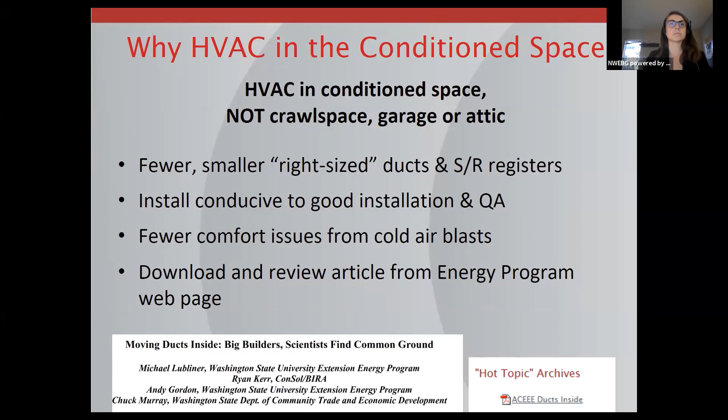It throws the air. With today's modern homes, if anybody tells you you've got to bring the air handler or ductwork to the supply register all the way out underneath a window, they're living in the 1950s. You do not need to do that, but you need to understand how registers work and move air around in a building as you're right-sizing and designing these ducts. Having a good understanding of ACCA Manual D, duct design, can help there. Work with your heating contractor in this stuff. They're really good. And if they don't understand it, find a heating contractor that does.

New Traditions doesn't use an open web truss, but they made a little space in their garage where their stairwell was, and they made that conditioned space. It's accessible from the garage through an insulated door, but it's part of the conditioned space. But they like it because when the heating contractor comes to service the house, they go into the garage. They don't have to get into the whole house. That was one of the takebacks.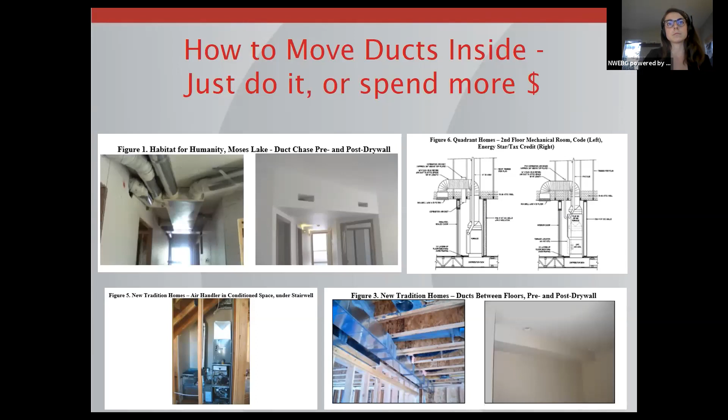So again, here's the Habitat one, drop the ceiling. You know, the architects have a term for this about transitional spaces. When you're in a home with a 9-foot ceiling and you walk around the home, you can't tell.

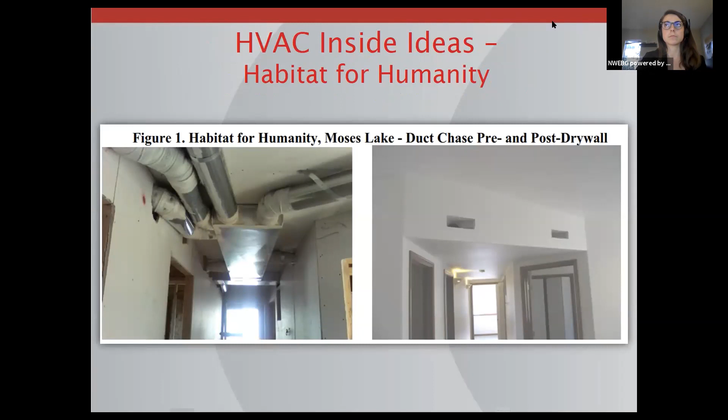The minute you drop the hallway to 8 foot, you can start telling the difference, the transition, when you move into the 9-foot bedroom or main living area. Here's some more of the details on the quadrant design and the New Tradition design. It can be architecturally pleasing if you design the soffits in a way that adds to the architectural theme of the home.

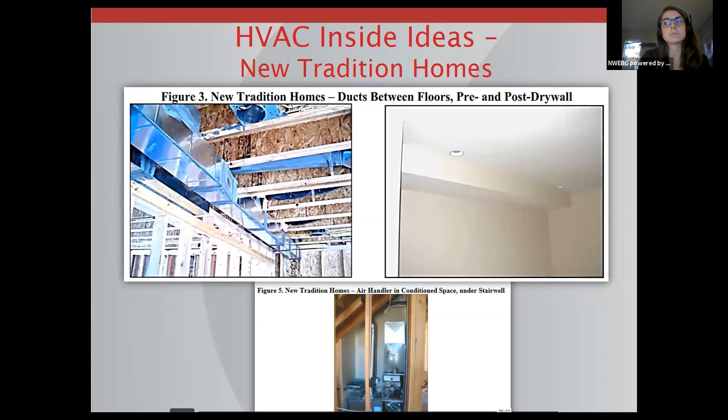All right, so let's talk about build tight, ventilate right. There are air barriers, and the Energy Code requires prescriptive air sealing of the envelope and testing of the air barrier. As I said, new construction and additions, you've got to get your CO. You need to show a blower door at 5 ACH50 or less. To get energy credits, as we showed, you're going to need to get it down to 3. If you want additional energy credits with heat recovery ventilation, you're going to need to build tight, ventilate right with a heat recovery ventilator.

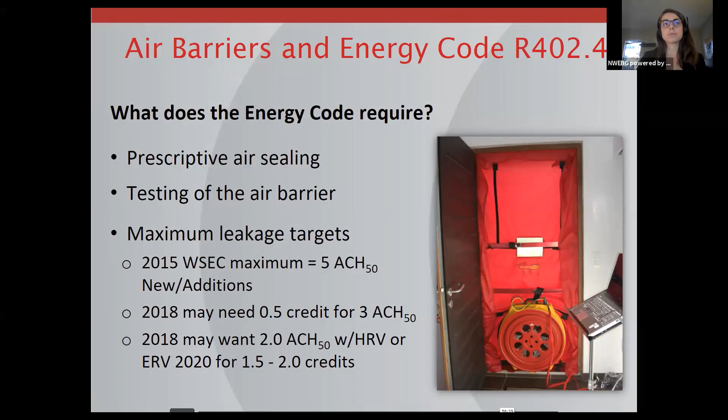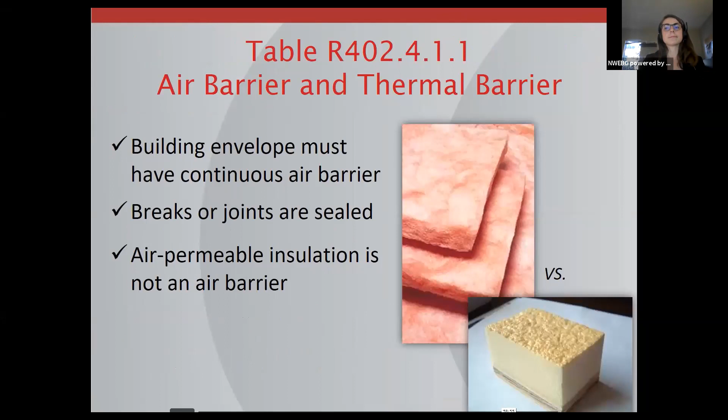Air barriers and thermal barriers. Fiberglass is not an air barrier. They use it for furnace filters. Closed cell foam is. Quite often builders will use a combination of these two products to get good air barriers and thermal protection. We have some fact sheets. There's tons of information about how to get new construction down to 5 ACH or lower.

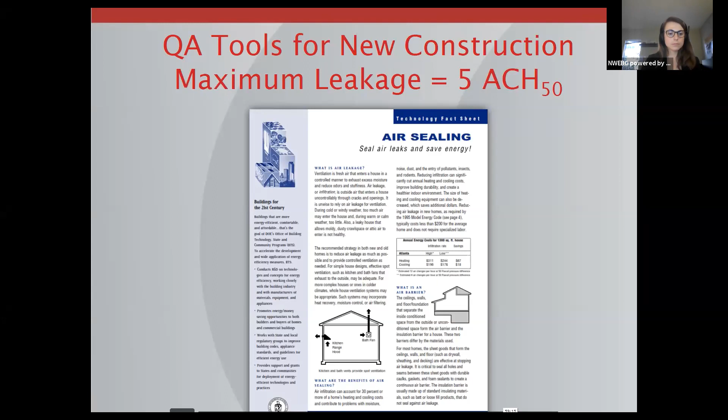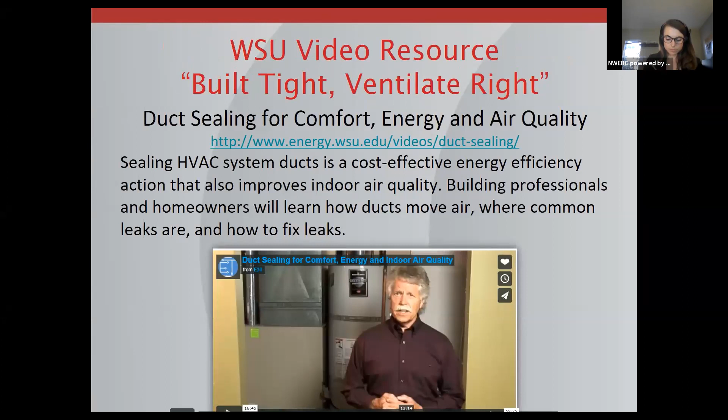As I said before, it's about planning 101. Who's made the leak? Who's going to seal it? What material are they going to use? When are they going to do it? And who's going to check? And we have some great videos that I would encourage everybody to spend some time looking at. Here's a video on why do we seal ducts and build tight, ventilate right. And another video on the invisible thief and on why ventilate. So this would be an assignment if you're home waiting for the virus to break. Spend some time on our website and look at these videos.

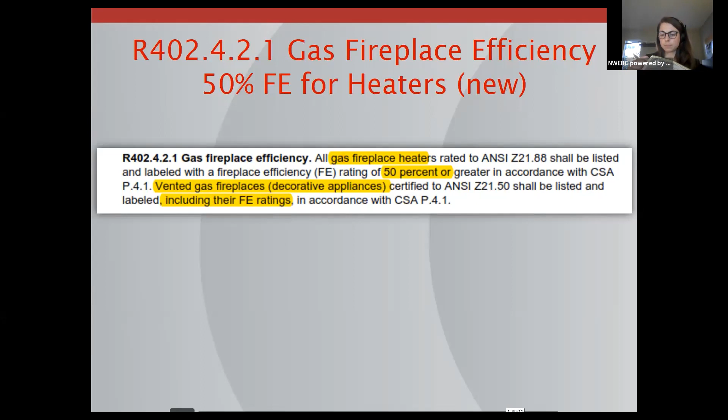There were some other efficiency requirements that changed in the code. I'll quickly go through those, but we're going to wrap it up here. Fireplace efficiency, there's two types of fireplaces. There are decorative fireplaces where you're going to have to show an efficiency, but there's no minimum requirement. And then there's gas fireplace heaters that are designed as heating systems, and they're going to need to have a fireplace efficiency listing of 50% or greater. So if you're putting in a fireplace and it's a heating device, the building officials would be looking for that FE rating.